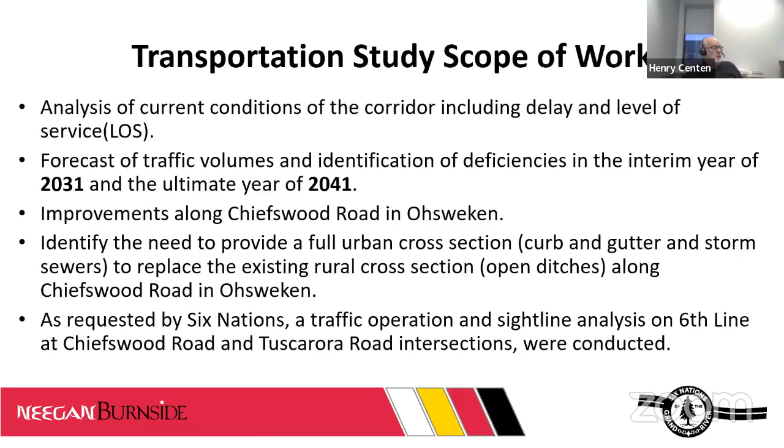So in general, in the area of Ohsweken, what we did find was that the intersection at Fourth Line with Chiefswood Road is a signalized intersection, it does have left turn lanes installed, and it is performing reasonably well. Although we did find from the traffic counting work that the southbound movements there did have queuing issues. So one of our recommendations was to continue to monitor that signalized intersection over time, and to adjust the signal timing to allow it to perform better than it is currently performing.

For the section between Fourth Line and the Village Plaza or Sunrise Court, what we did find was that there are a number of access points along that section. There's no turning lanes that have been installed. And so the warrants for turning lanes are met currently for a number of those access locations. And because of that, we were suggesting that there should be a widening through there to accommodate a left turn lane.

And because of the density of the access locations, we're suggesting that it would be a continuous left turn lane through that whole section. And that would be suggested to be done anywhere between now and 2031. 2031 was sort of the ultimate, that it should be done before 2031.

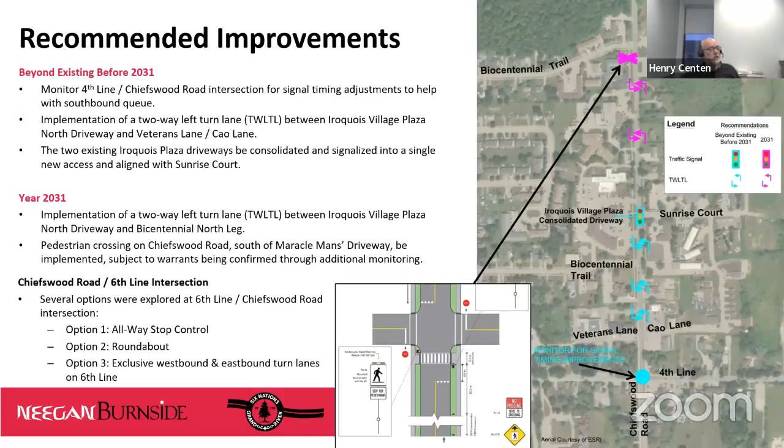So it could be something in the longer term to be considered, but at this point, the volumes aren't justifying the need per se, because there is the option of continuing to have a two-way stop control intersection at that location and implementing an eastbound and westbound left turn. If you want to put the next slide up there.

But in particular, vehicles coming southbound across the bridge also have a limited sight distance to view traffic coming off of Sixth Line. So we had suggested that should continue to be monitored, and also speed should be monitored through that area, because the sightline requirement is directly determined by the operating speed on the main road in that area. So that was in addition to considering the eastbound and westbound left turns off of Sixth Line; some ongoing monitoring would assist in making sure that this intersection continues to operate safely.

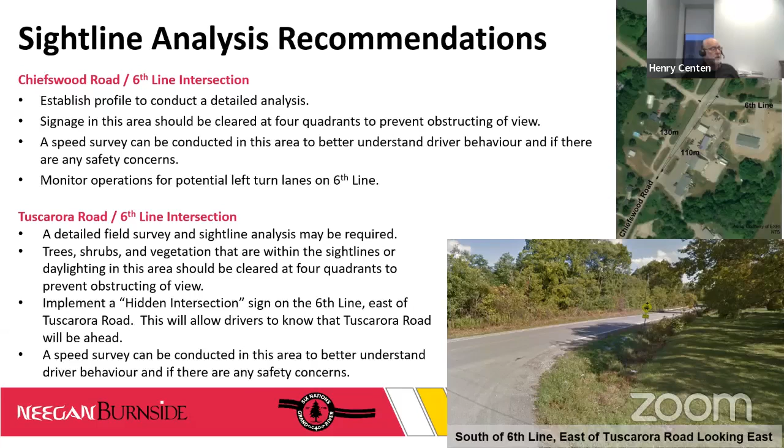So we are suggesting that there should be some signage, just warning of the intersection, and also some ongoing speed work done to ensure that the sightlines do meet the actual speeds that are operating in that area. Next slide, please.

The next 3 slides are actually showing a preliminary design of improvements to Chiefswood Road in Ohsweken, and you'll see on the slide before you here, the grayed areas are the access points that come into Chiefswood through that area. It also shows the amount of widening required in order to accommodate this 2-way left turn lane.

And you'll see it's a 2-way left turn lane commencing to the south of 4th Line, and then becoming a dedicated left turn lane at the signalized intersection. And to the north of 4th Line, it becomes again a 2-way left turn lane to be shared in both directions for turning movements into the accesses in that area. So this first slide goes up to the gas station, but the next slide will continue on.

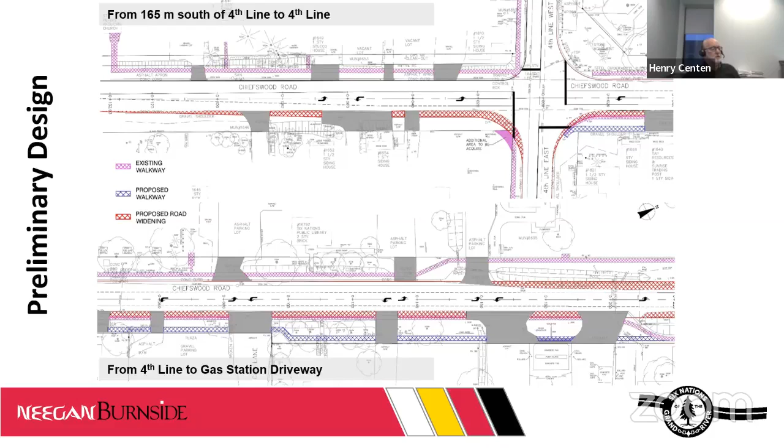So starting from there, it goes from the gas station up to Sunrise Court. And at Sunrise Court, you'll see that the 2 entrances that go in there now are proposed to be closed and replaced by this new signalized entrance that comes in. And you'll see the widenings there as well.

The section to the south is already what we call urbanized, which is a curb and gutter and a storm sewer system, whereas a part of Chiefswood Road within Ohsweken to the north here, north of Sunrise, is what we call a rural cross section, given that it has either drainage ditches in it or swales that end up requiring culverts, etc., to function for the drainage purpose.

We would be recommending that you would be urbanizing when you would expand the cross section here. It would be urbanized to have the urban cross section with the curb and gutter continued on to the north part of the built up area.

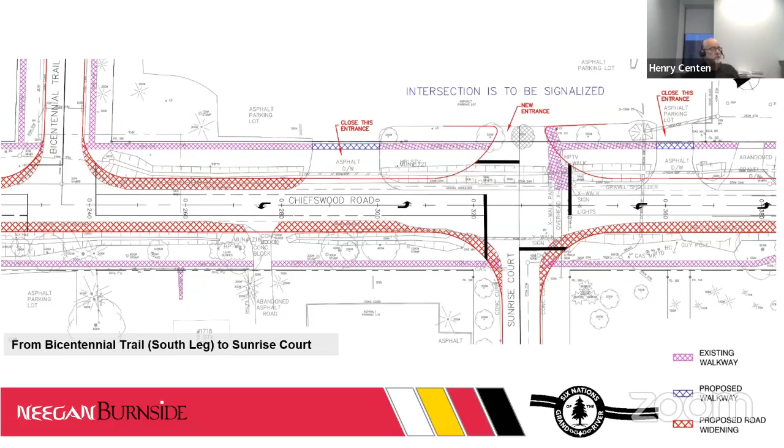So next slide, please. We're also recommending some improvements to sidewalks, some continuation on the east side of the road, all the way up through, which is typical of arterial roads, and this would be considered to be an arterial road. It's typical to have sidewalks on both sides to minimize the number of pedestrian crossings mid-block required across the arterial road.

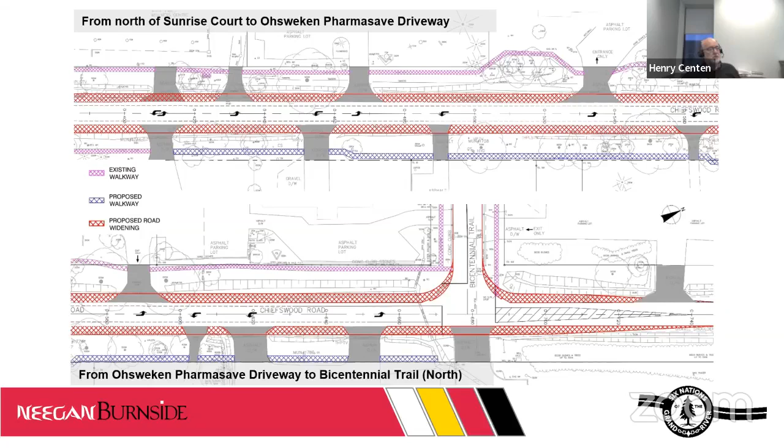So this shows you sort of where it terminates, and then it becomes more of a rural section to the north of Bicentennial Trail. Next slide, please.

Okay, so that sums up the work that we did in our study for the transportation component. I'd like to just go through quickly the road needs study that we completed. The road needs study was focused in the area, in order to determine what the condition of your road is, and that's based on a visual assessment and what we call a pavement condition index that is established from that.

And the pavement condition index is established by having a visual review. We send our technicians out to do that review, and again, it's really looking at the different types of distresses that the roads are experiencing, from cracking to various other types of distresses, and then using formulas that have been developed by the Ministry of Transportation to convert that over to this pavement condition index.

So really what the pavement condition index tells us is what kind of condition the road is in, and that informs us as to where it is within its life cycle, because the road has a certain life cycle associated with it. It degrades over time, and so in order to implement the appropriate response to the condition of the road,

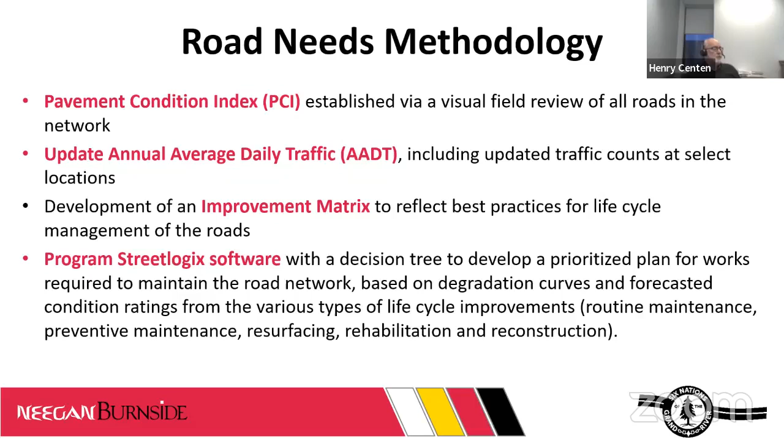And so the degradation curves give us some information related to how it might perform over time, but it is also good practice, when you do future upgrades, to see how these degradation curves are performing relative to being the forecasting tool that they're intended to be. Next slide, please.

It does show you that over time, with budgets being limited, you're always going to have some roads in that fair or poor category, and we refer to those as backlog roads. The life cycle improvements are intended to remove some of those backlog needs early on in your 5 or 10 year capital plans. That allows you to get the roads to a certain level of condition that lets you proceed and broaden out to address roads earlier in their life cycle with either preventive or routine maintenance or even resurfacings.

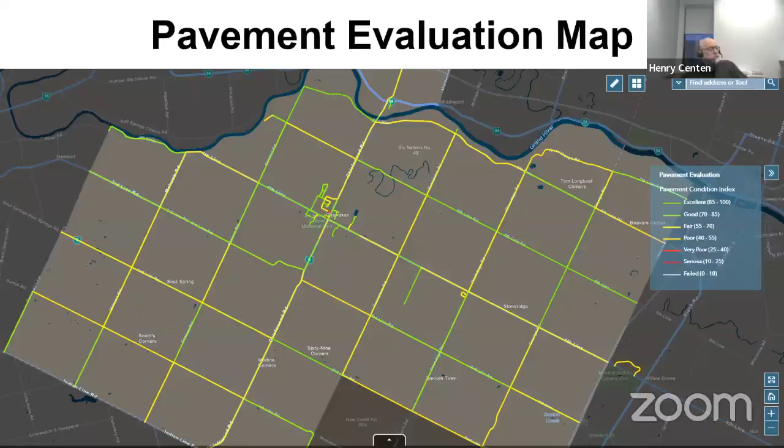The theory being that if the roads are allowed to deteriorate too far in their life cycle, each time they deteriorate from one type of improvement to another, the costs go up fairly significantly. So it is good to try and get the maximum lifespan out of your road system by using a life cycle approach to the management of the system. The next slide, please. So falling out of that, and the decision tree that was put into StreetLogix, it does tell us what the recommended improvements would end up being.

And then the rehabilitation is more extensive work that needs to be done to the road. And then ultimately the reconstructions, but there's no reconstructions shown here. Okay, I mean, from a condition point of view, you are going to have reconstructions, as I said, through Ohsweken, but it's not because of the condition of the road currently. It's from the transportation needs of the road in that area. Next slide, please.

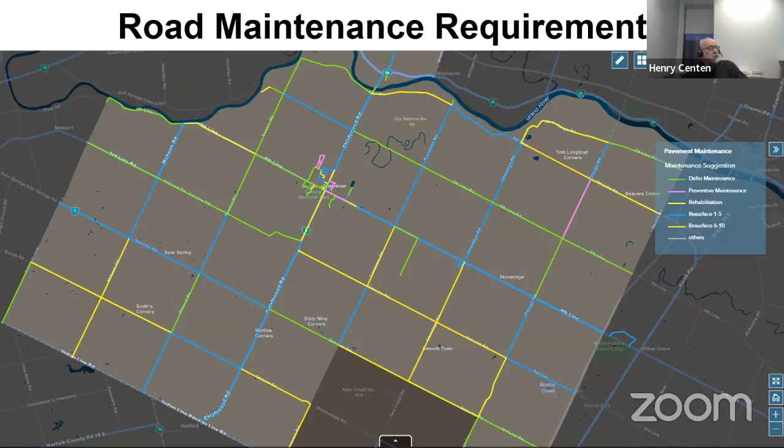For truck traffic, you do have a number of trucking companies and some other commercial development that has occurred on some of these roads, and so it's not just the arterial connecting roads that are being impacted, but some of these secondary roads as well, and that truck traffic does have a very significant impact on the design of the road, but also on its longevity over time. So it is important to continue to monitor that and to take the appropriate treatment at the appropriate time.

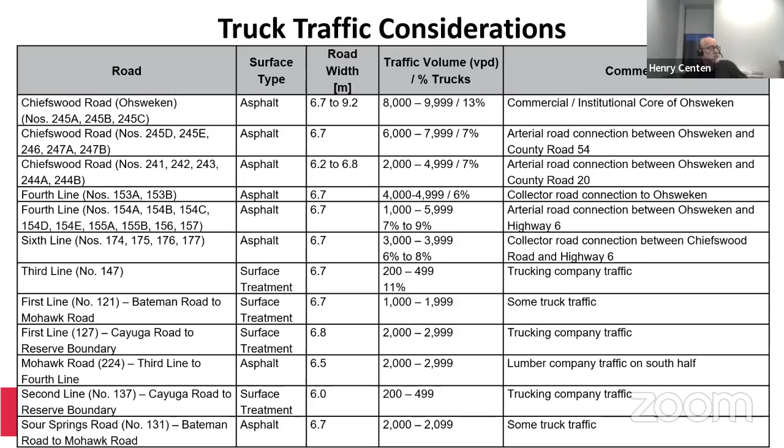We have some here, like this one in particular, it's a fairly small amount of traffic on it, 200 to 500 vehicles in a day, but the surface treatment may not be sufficient even at those volumes to really hold up over time. So that would be a situation where you may want to go to an asphalt surface instead of a surface treated surface on that particular road. Next slide. I think are we into the, no, okay.

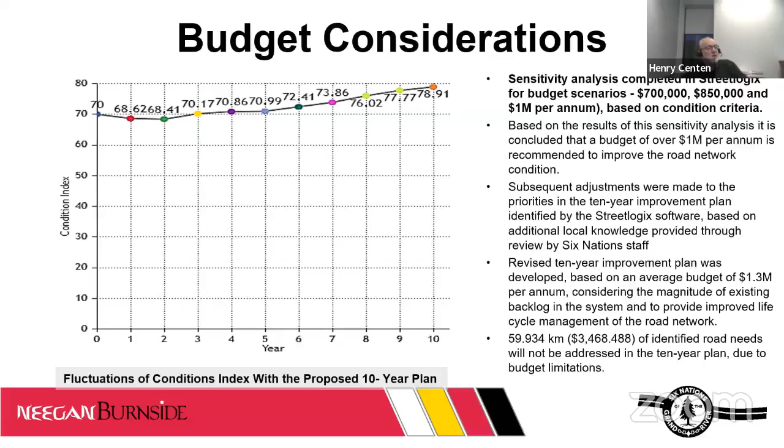And then from there, it'd be great to take stock of how we've done and how we've impacted the network, and come back out to the community even before then to say, here's the plan for the next 5 years to finish off this 10-year period. Again, as I noted at the outset, that's our minimum commitment to the community. We may choose to accelerate different things in different sections depending on how the seasons impact them, because everything's impacted by climate change and the freeze-thaw and the trucking. So those are our best laid plans at this moment in time. And we're working with Vince and Darren and Kevin to make sure everything's tendered out and we get contractors in here to execute this plan.